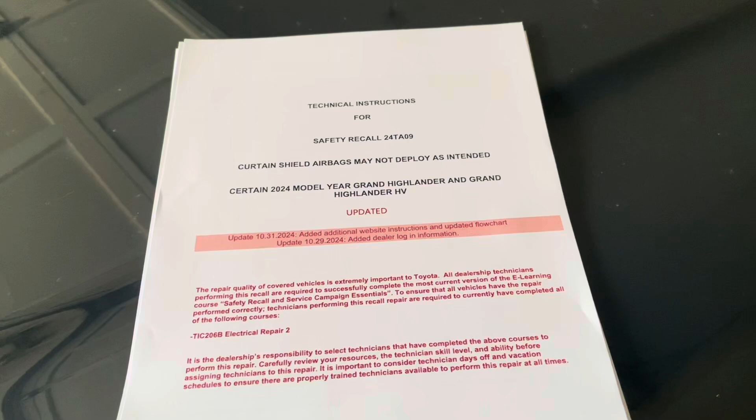Back here with Mike's Mustang Repairs, and today we're going to be looking at this 2024 Toyota Grand Highlander, and specifically the airbag recall and the steps that are taken in order to fix that. We're just going to double check and make sure the dealership does it correctly and to our satisfaction. So let's get after it.

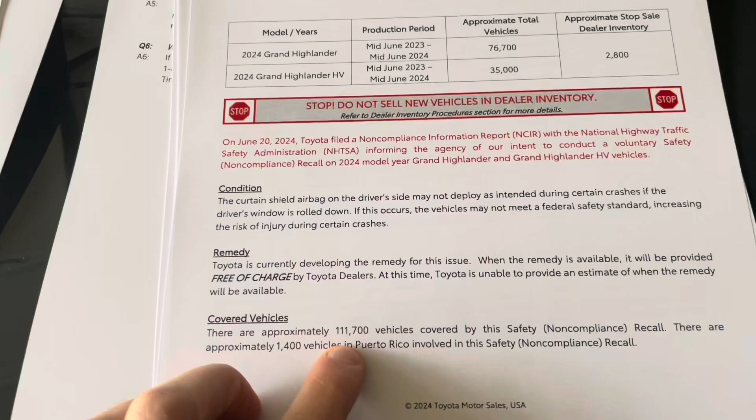The quality document shows that there's 111,000 vehicles covered by this non-compliance recall, and then 1,400 in Puerto Rico. So quite a significant number. There are 51 steps in the manual to do this repair, and afterward we're going to do the vehicle repair quality check.

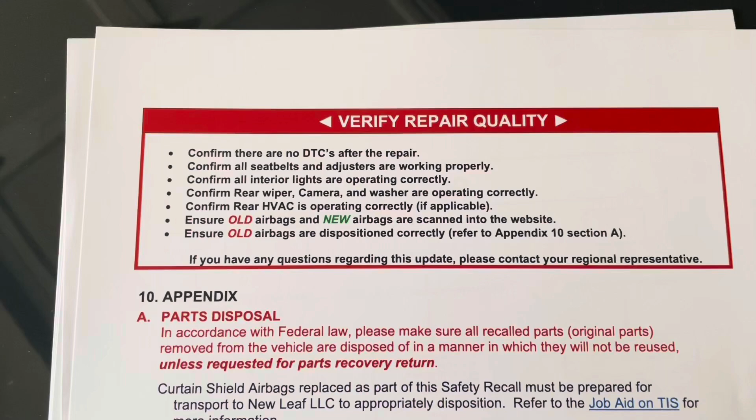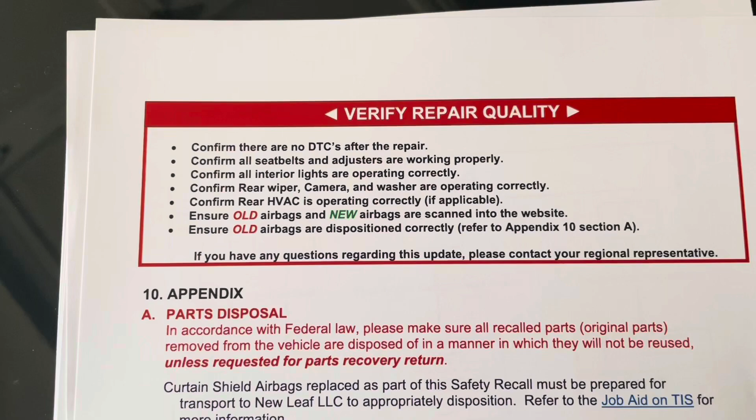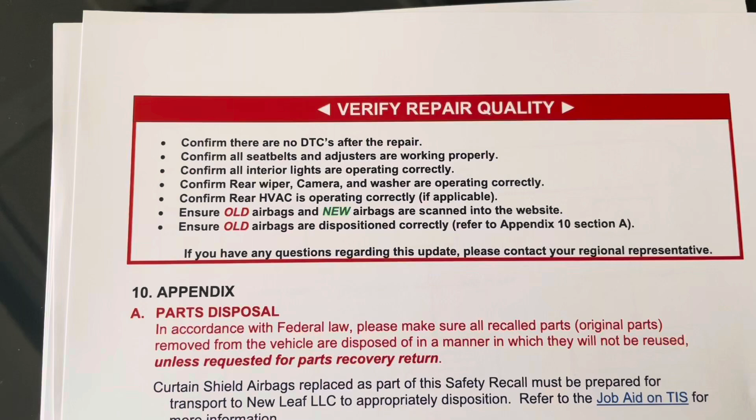So you're going to make sure there's no codes, confirm the seat belts and adjusters are working properly, confirm all interior lights are operating correctly, the rear wiper, camera, and washer are all operating correctly, the rear HVAC is operating correctly, and then of course they'll check if the airbags have been scanned into the system. We'll skip that step, but this is what we're going to be looking for.

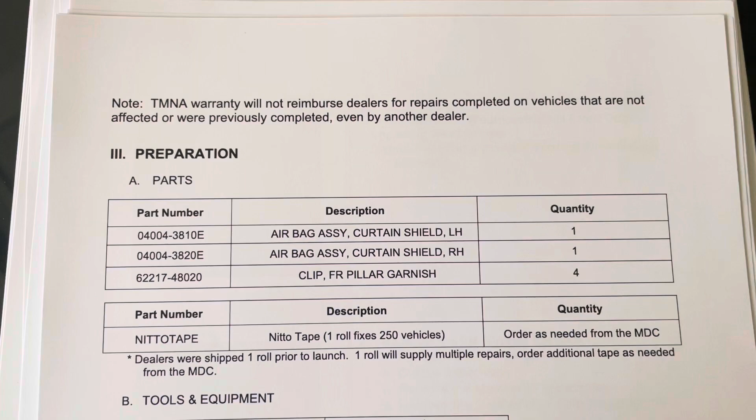The parts they're going to use are the new left hand and right hand airbag assembly, as well as 4 pillar garnish clips, and then some tape. We'll work through the steps.

I won't show each and every one of these, but we'll just kind of demonstrate on the Highlander what they're going to do. So the first step is going to be to remove this weather stripping, and then the second is going to be to remove this left-hand pillar right there.

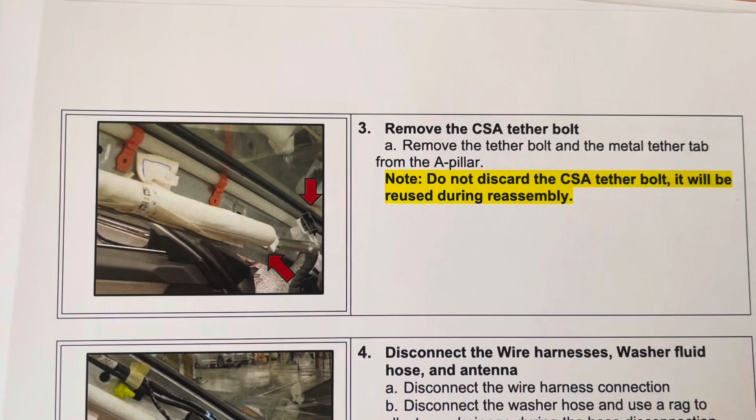Once inside, they're going to remove this tether bolt, and then the wire harnesses, washer fluids, and antennas. Step 7 and 8, they'll remove this sun visor by twisting it and pulling out, and then they'll remove this rear mirror and this center console piece up here.

The next step will be to remove this B pillar right here. They'll remove the same pieces on this side, inclusive of this handle, so there's bolts behind here that they'll need to get to, and then of course the weather stripping and the A and B pillar down here.

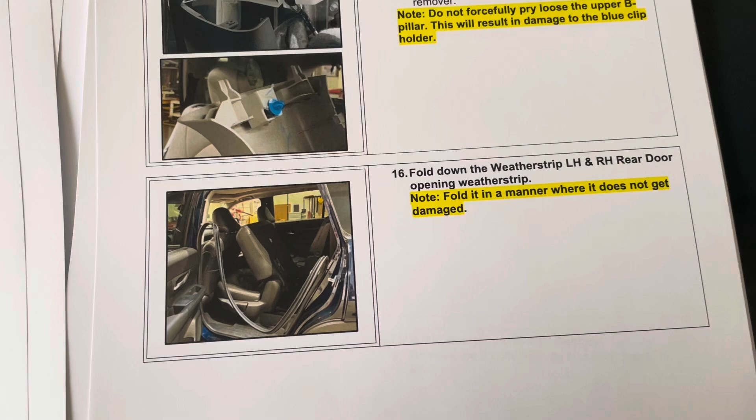They'll move to the back and they'll remove this weather stripping once again. And it's interesting to note that they actually call out things that they think can potentially get damaged, highlighted in there. There are handles in the back they'll have to work around. They'll take those out similarly to the front, and then these lights and vents.

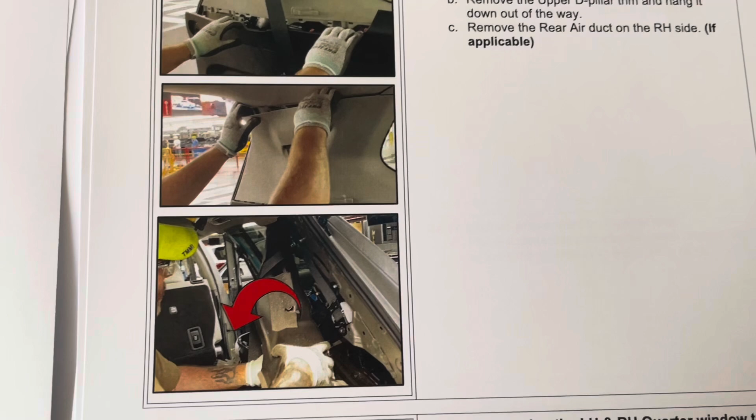Steps 18 and 19, they'll remove this quarter panel trim here, and then they'll also need to remove that pillar right there. In the back, they actually have to remove the rear air duct, if it's applicable. Back here, it says to unfasten and let the window trim hang, and it specifically says don't remove it, so not sure what that's about, but that's what it says.

And finally, they'll work through removing this seatbelt harness as well. Step 25 is to remove this entire headliner from the car.

It says it takes 3 people to remove, and they make sure that you don't crack, damage, or mutilate this in any way. I'm really interested to see how dirty it gets, given that this is a very light headliner, and so interested to see what they do here. I'm hoping for the best.

Step 26 is to remove the negative battery terminal. Makes sense, they're working on the airbags. They don't want them to accidentally discharge. Then they walk through removing the curtain shield airbags and the documentation steps of the process.

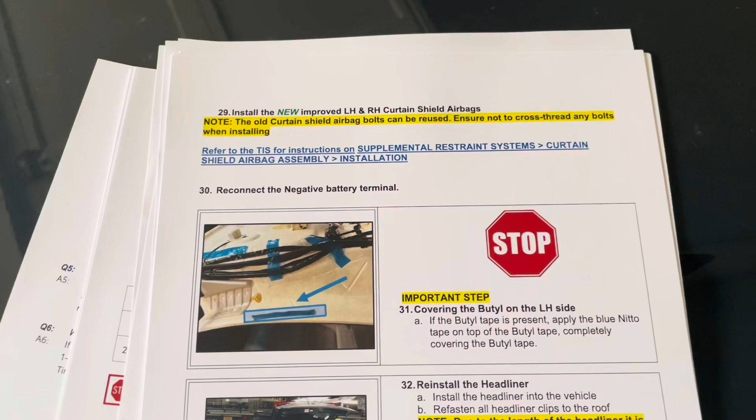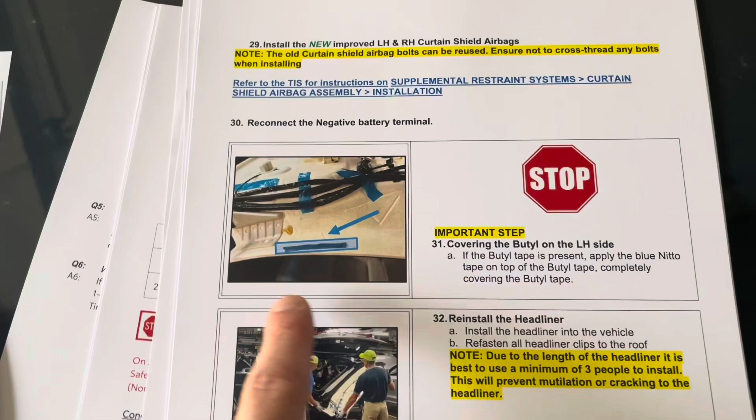Now that the airbags are installed, they go ahead and start the reassembly process. They're going to reconnect the negative battery terminal, and then I don't know what this is about, but covering the butyl on the left hand side with tape. So seems like a really important step. Don't think we can check that as a consumer, but it's in here.

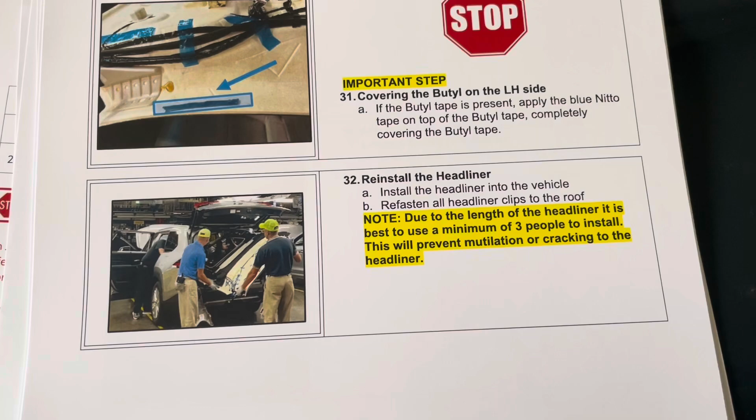And then note the importance of using 3 people to install the headliner again. And I mean, it's massive, so interested to see there how that works. They'll just work their way backwards. They'll go from the back of the car, the rear of the car.

They'll start putting the seatbelt assemblies back together, the pillar trim pieces, and all of those trim pieces, headliner. So interested to see how the sunroof plays out, and just any damage or potential damage that gets done to the car. We'll see. I hope they can do well.

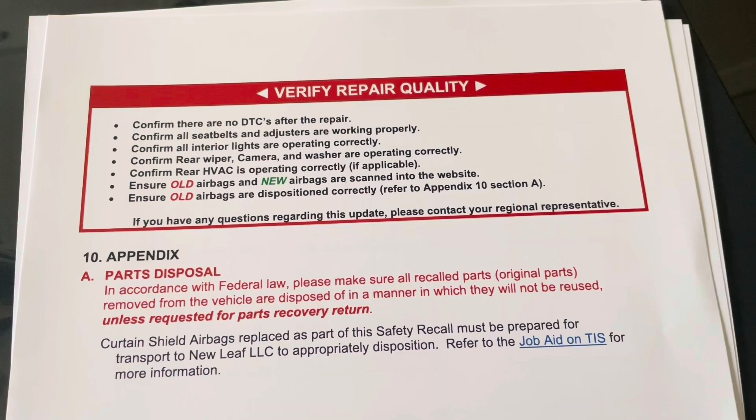We'll have a look. And then finally, here's the list of things that you really want to check. It makes sense given what they're replacing and working on. So once again, no error codes on the dash. Seatbelts, adjusters are working fine. Interior lights are working fine. And then the rear wiper, camera, and washer are all working correctly.